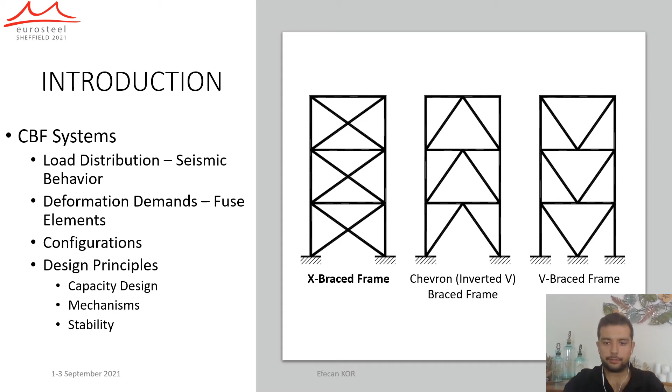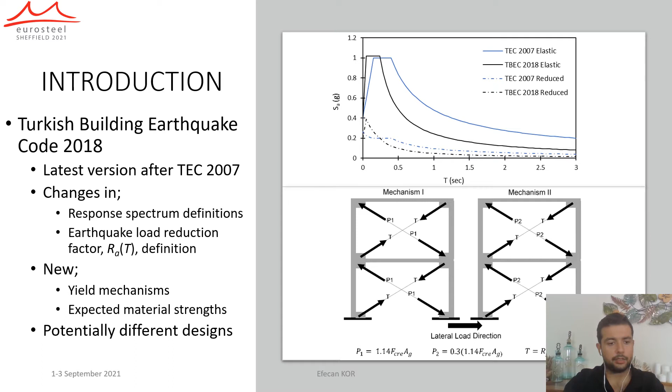The next topic that I want to express is the Turkish Building Earthquake Code 2018, which was published in 2018 and superseded the previous one, the Turkish Earthquake Code 2007. During this transformation, several changes were introduced, such as response spectrum or earthquake load reduction factor definitions. Also, new concepts were introduced, such as yield mechanisms or expected material strengths, and these yield mechanisms shown in this figure are similar to the ones in AISC specifications, and all these changes are expected to affect the CBF designs.

So this led us to the next topic, which is the motivation of this study. As I mentioned just before, the transformation from the previous code to the new one has introduced several changes in the design procedure. This situation can be expected to affect design approach and loads, and accordingly it can lead to possible differences in CBF design. Thus, this study aims to understand and present the seismic behavior of X-braced frames designed per TBEC, and to that end, a two-story X-braced steel frame was designed in accordance with the requirements defined in TBEC, and it's analyzed using the IDA procedure. And now I will continue with the structural design.

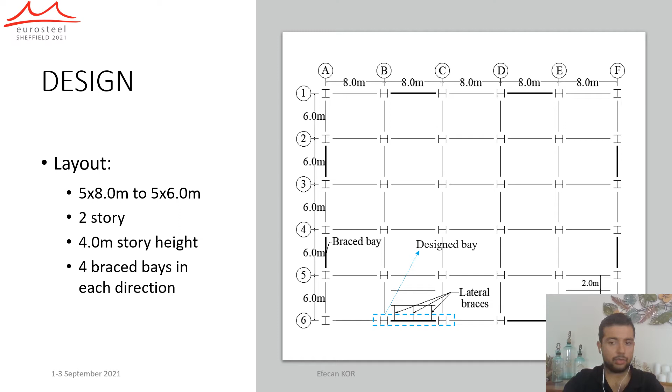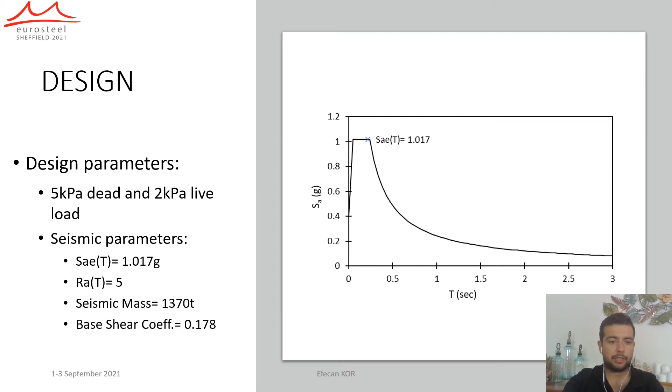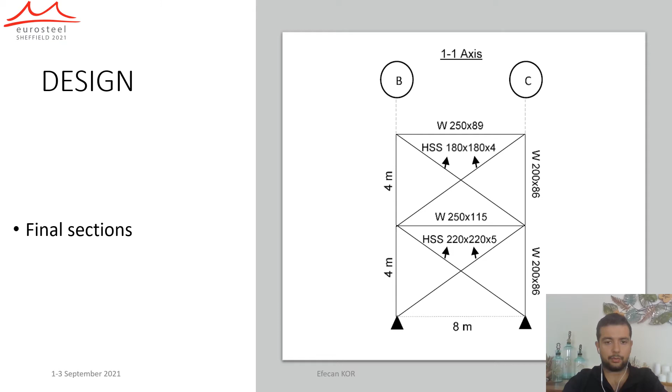We have a 40 by 30 meter floor plan with 5 bays in each direction, and 2 out of 5 bays are braced bays, which are shown with thicker lines. Also, there are 2 stories with 4 meters constant height, and the design parameters and loads of the building are as follows. The design level response spectrum of the building is provided in this plot. The marked point on the curve represents the elastic design spectral acceleration, and the final sections coming from the design are shown here. W sections were used for beams and columns, and HSS sections were used for the braces.

After the design procedure, it comes to the nonlinear numerical model, which was developed in OpenSees software as a 2D model. All members were modeled as force-based nonlinear beam-column elements consisting of fiber sections, which means the distributed plasticity approach was adopted, and the Steel02 material was used for all elements, which is currently available in the platform's library and follows a hysteretic model. Also, all connections were assumed to be simple connections, including the column bases.

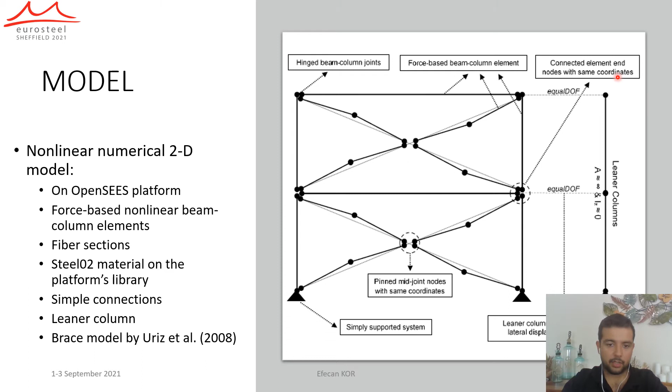Also, leaning columns were implemented in the model in order to account for the P-delta effects, and to simulate the buckling behavior of the braces, the brace model proposed by Uriz was used, which suggests placing an initial camber at the midpoint of half brace length, as drawn in this figure.

As I've just mentioned, the brace model proposed by Uriz was adopted to model the brace elements of this study. In this approach, each brace element is suggested to be divided into 4 connected segments with initial cambers of 0.1% of half brace length, which are assigned at the midpoint of each half brace, as also illustrated in this figure. There's the half brace length and initial camber.

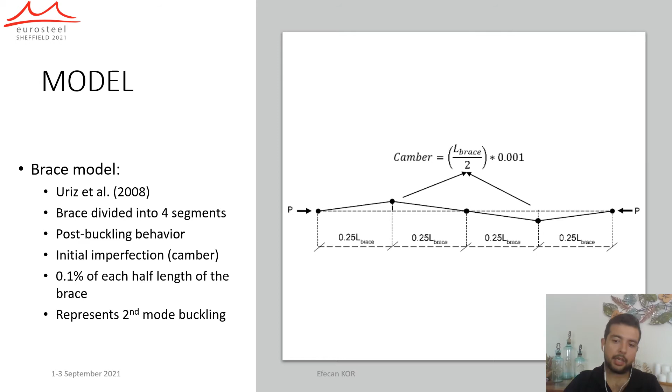Also, it can be seen that this model represents the second mode buckling deformed shape of compression elements, which are restrained at their midspans. The purpose behind this is to be able to account for the post-buckling behavior of each individual brace element.

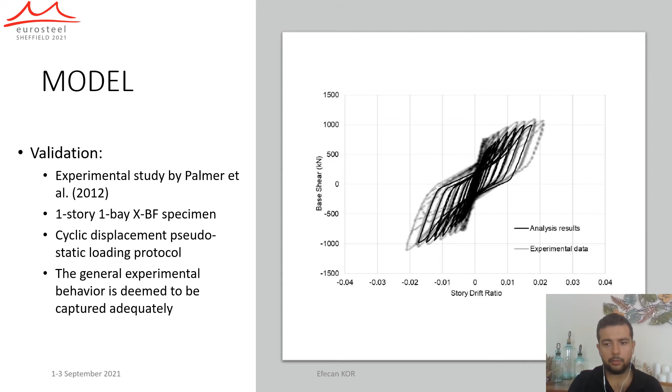It can be deduced that the model captures the general behavior of the experimental study. However, it underestimates the base shear, especially in the elastic region. But in general, the numerical model was deemed adequate for the purposes of this study.

The next chapter is the analysis part. After constructing the numerical model, the designed system was analyzed under a set of ground motion records. The incremental dynamic analysis procedure was adopted as the nonlinear dynamic analysis method. This analysis approach is an effective tool to observe the relation between structural response versus ground motion intensity, and to understand the dynamic capacity of a structural system.

In this method, the designed system is subjected to ground motion, which is scaled up incrementally at each analysis step until a limit state is triggered. This is, of course, a brief explanation of IDA, which is described in detail in the study by Vamvatsikos and Cornell. Also, limit states can be defined in terms of damage or intensity measures.

For instance, interstory drift ratio, base shear, or another damage indicator can be chosen as a damage measure, while peak ground acceleration or spectral accelerations can be selected as intensity measures.

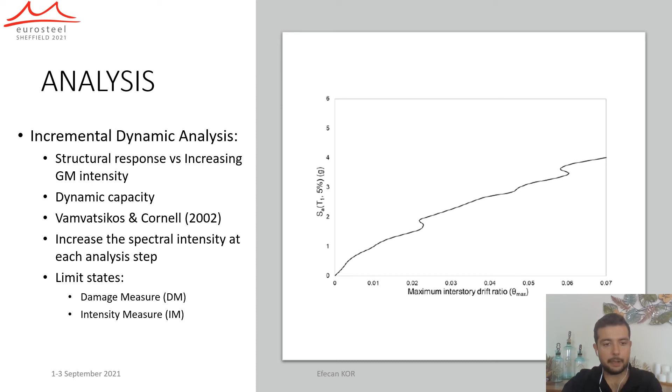For nonlinear dynamic analysis, a set of ground motion records, including 12 separate records, were selected from the PEER NGA-West2 database to be consistent with fault type, fault characteristics, and site conditions. On the other hand, a typical 2% mass and stiffness proportional damping was assumed, since it's a generally accepted value.

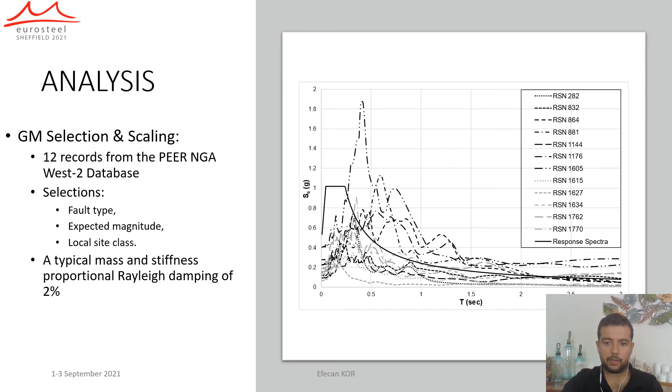Those points were observed at the spectral acceleration value where at least one of the DM or IM based limit state rules is achieved. The limit states chosen for this study are 5% maximum interstory drift ratio and 80% reduction in initial slope of each IDA curve as damage measure and intensity measure rules respectively.

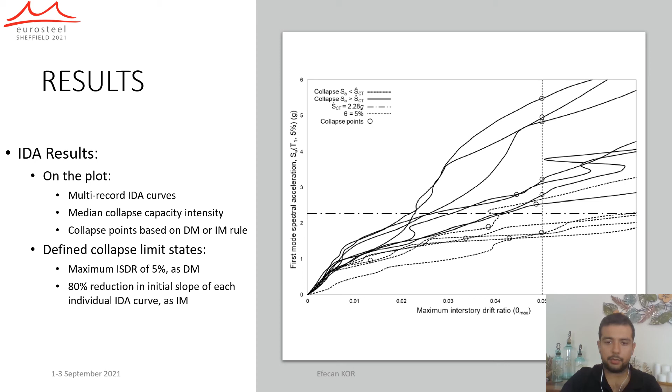And the horizontal dashed line indicates the median collapse intensity, which was calculated as 2.28 g, while the vertical dashed line is maximum interstory drift ratio equal to 5%.

From the fitted curve, the median collapse intensity of the system, or in other words, spectral acceleration at 50% probability of collapse, was obtained as 2.28 g. For this system, the maximum considered earthquake level spectral acceleration was calculated as 1.67 g from the response spectrum defined for the maximum GM intensity level considered in the TBEC,

the seismic code, and accordingly the collapse margin ratio of the system at MCE level was calculated as 1.37, and also the probability of collapse of the system at MCE level was obtained as 30%.

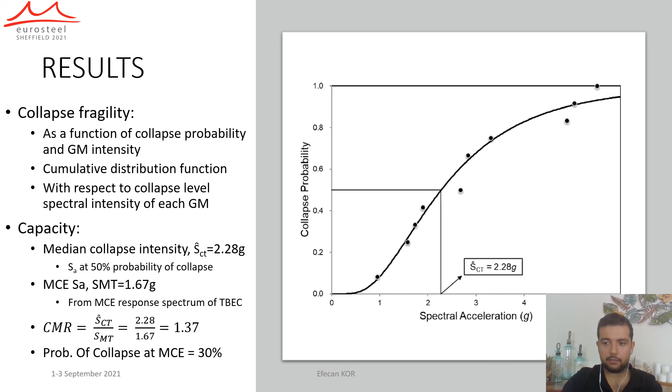And I would like to wrap my presentation up with the conclusion part. In this study, it was intended to understand and present the seismic behavior of X-braced frames designed per TBEC. Therefore, a two-story XBF was designed, modeled, and analyzed by adopting the IDA procedure, and the results of IDA were used to construct a collapse fragility of the system, which enabled us to obtain several indicators that provide insights into the seismic behavior of the designed system.

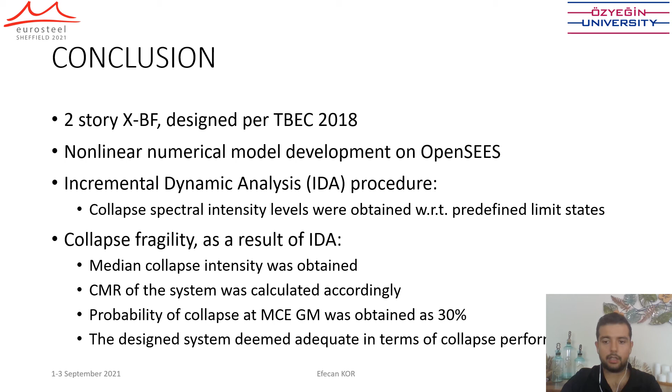Also, the collapse probability of the system was calculated as 30% at maximum considered earthquake level. And as a general outcome, the designed XBF was found adequate in terms of its collapse performance.